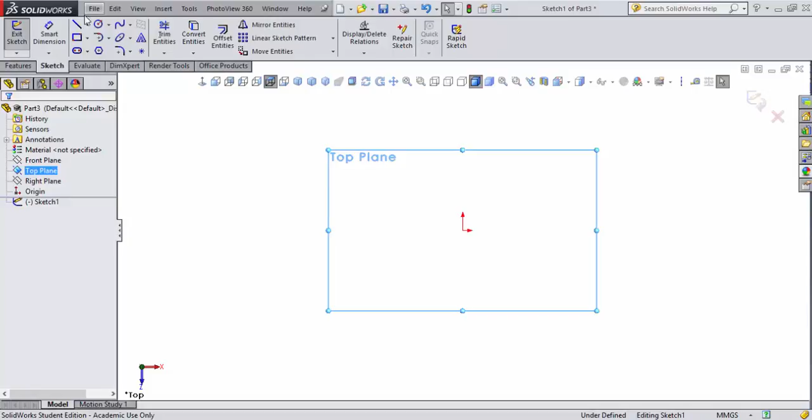Now that I'm oriented to the top view, I'm going to come over here to Sketch and create a new sketch. Now I'm going to line myself here to the top of the triad, just a little bit above it, not actually starting my line from there.

I'm just going to draw an arbitrary line just above that. Then what I'm going to do is come back here and draw another line down to about right there. Okay, I'm going to go ahead and set some dimensions real quick.

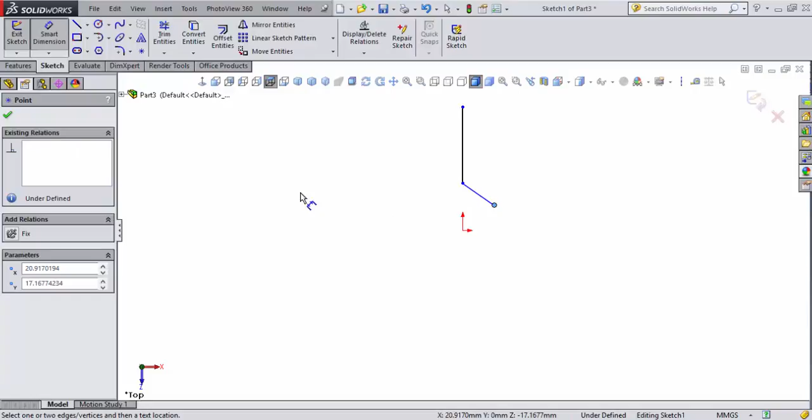First of all, my length of this line right here, from here to there, is going to be 1.5.

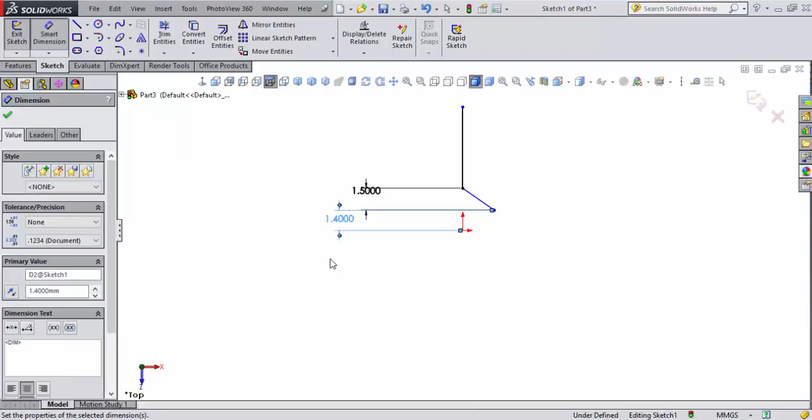Okay, then I'm going to set a dimension from here to there, coming down off this, and that dimension is going to be 1.4 millimeters. And then this dimension here coming out is going to be 2.1 millimeters. So it produces me that.

Now what I need to do is change the angle of that to the actual angle we need, which is 150 degrees. So as you can see here, I've keyed in 150 degrees and I'm going to go ahead and accept that. So there's our sketch at this point.

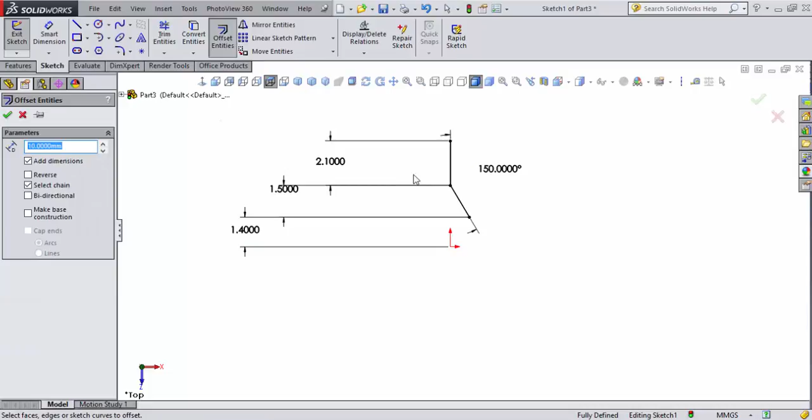Next thing we need to do is an offset entities, which copies a parallel line. So I'm going to select this one here. Notice I put it way over there. Now we don't want that.

So first of all, let's make sure we set the copy parallel to 0.3, and then we will reverse that to the outside. So let's see if we can reverse that, so it's on the outside. Yeah, that looks good, go ahead and accept that.

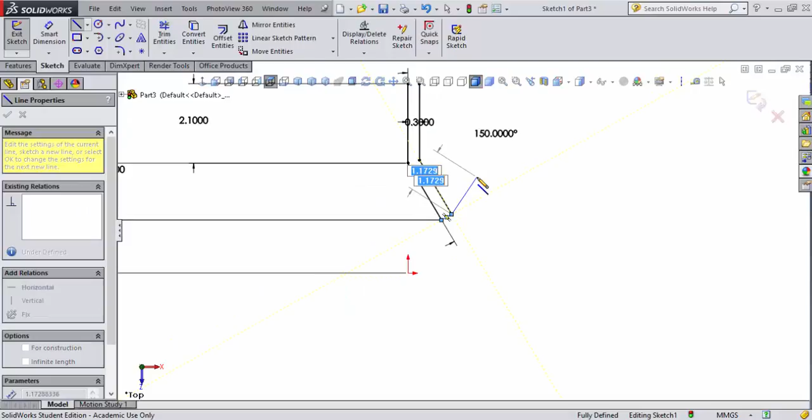Go back to our sketch command. We'll zoom up on this point here, and we'll make that work. And we'll come out here to here, we'll get that line command again. We'll come over here to this, and we'll select that. Yeah, that looks pretty good.

Okay, now what I'm going to do is set myself to the isometric view, as you see here. I have to do one more operation, and that operation is I have to come in here and place a center line horizontal to this artwork. So I'll go over here and select center line, and I'm going to select horizontal and get infinite.

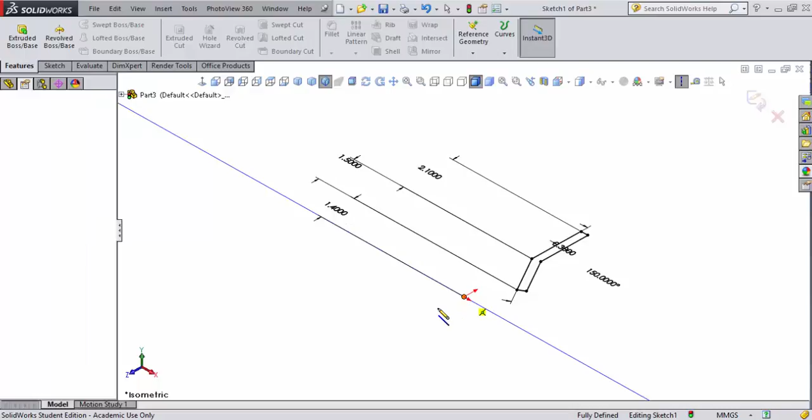I'm going to come out here and snap to the datum. So that basically forms an axis of which I can rotate around. So I accept that, and I go to revolve boss base. And as you can tell, it's going to revolve around this one area here where I created that center line. So I'll go ahead and accept that.

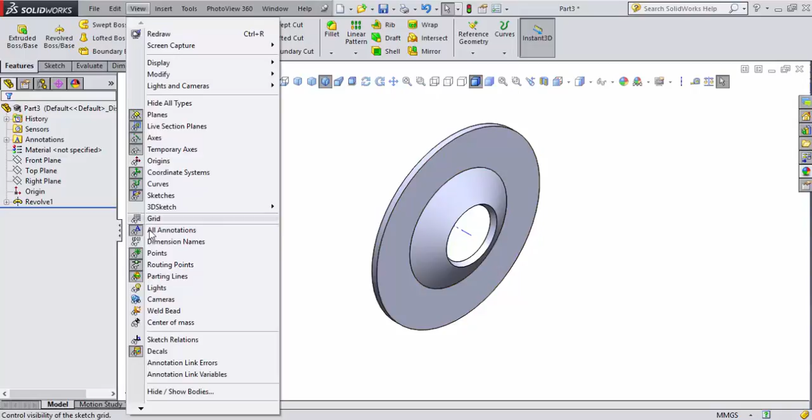Now that I've got this revolve boss base taken care of, I'm going to go ahead and use the F key to fit it on the screen. And then I'm going to go ahead and do a rebuild of my part. I do have a temporary axis turned on, so I'm going to turn that off. And I'll rotate around and click on that back face and set myself normal to it.

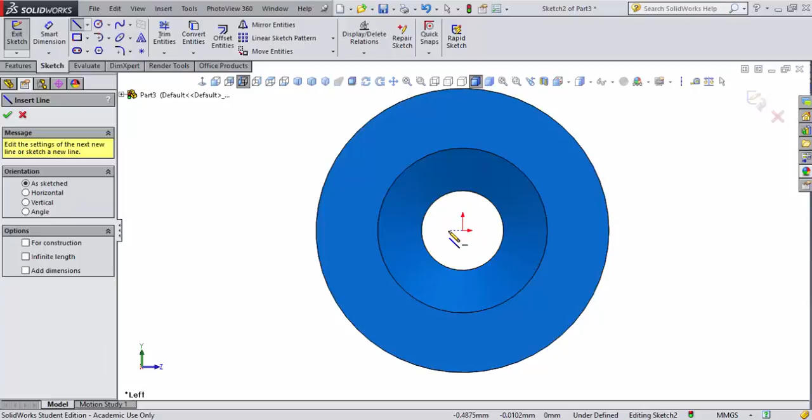Now with that done, I'll do a rebuild. I'm going to go over here to Sketch and draw an arbitrary sketch across this area, making sure I'm planar to that face. I'll draw this sketch about so far.

Now I'm going to add a relation to that. I'll select this guy here, actually deselect it, come back over, add relationship to it, select it, and add a relation by clicking on it here. And I'm going to clear off all these.

Now I've got this, and I'll grab that point. I'm going to add what's known as a midpoint, by hitting the datum and the line, then come back and add a midpoint to that. I'll come back to this in a moment. With the midpoint set on this line, I'll go ahead and accept that.

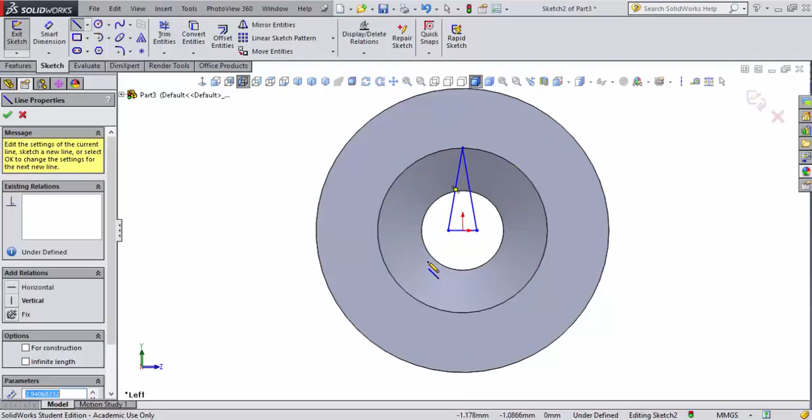I'm going to draw a line from this point here all the way up to this crease underneath the bottom, on the center point of that part of the circle. Then come back here and accept that. I'm going to put a smart dimension here and set it to...

While I'm in the sketch right now, I'm going to select my features and go ahead and hit extruded cut, set myself through all, and accept that.

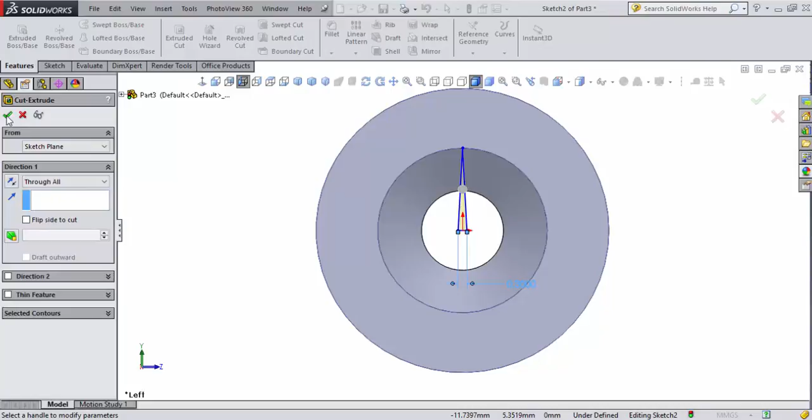As I rotate around, you can see it actually extruded all the way through that part of the part. So let's set ourselves normal back to the face. Alright.

Go ahead and do a rebuild, make sure our sketch is rebuilt, and we'll zoom out here and rotate that around. Bring ourselves normal to that.

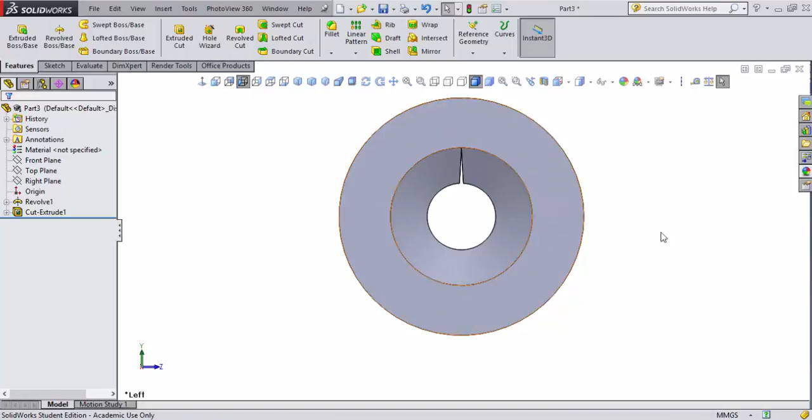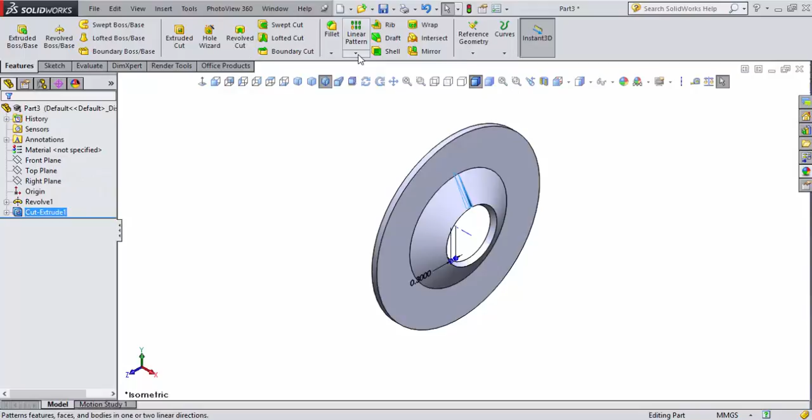Now with our extrude cut in the way we want it right here, we're going to set ourselves to an isometric view, as you can see here. I'm going to go back out to View, turn on my temporary axes, and then select that particular extrude cut. I'm going to go down to where it says linear pattern, and come down to circular pattern, as you see here.

Now what I'll do is snap on the center axes I just created. I've gone ahead and set myself to 6 rotations, which creates 6 iterative cuts around that one area. I'm going to accept that. Okay, so that's put that in there as well.

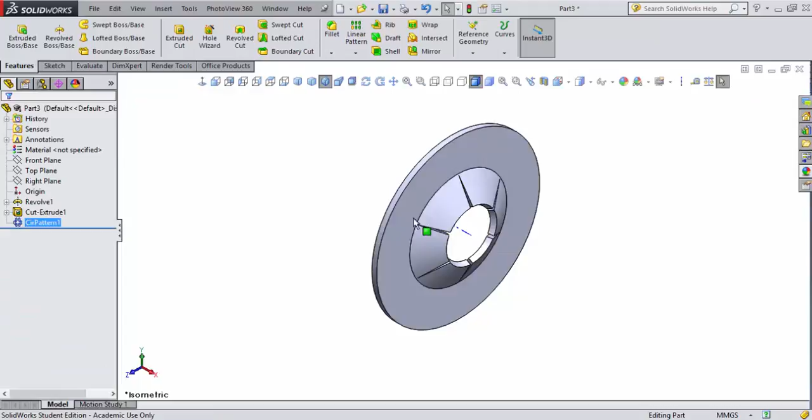That looks pretty good. Let's go over here to our material, right mouse click, and set that to cast alloy steel, so it can give us an appearance of what our axle clip's going to look like. I'm going to come back over here and turn off my temporary axes.

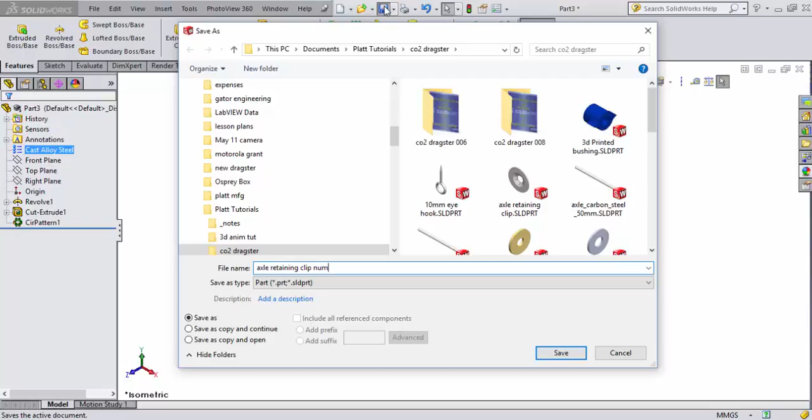So let's go ahead and save our file so we know what we have here. I'm going to save, just click on save. I'm going to come up here and put axle retaining clip number, just key in NUM, number 2, and accept that.

So there it is. Now once we've got this part completed, we're ready to go ahead and build our design library. We're going to come back and build our design library in a moment.